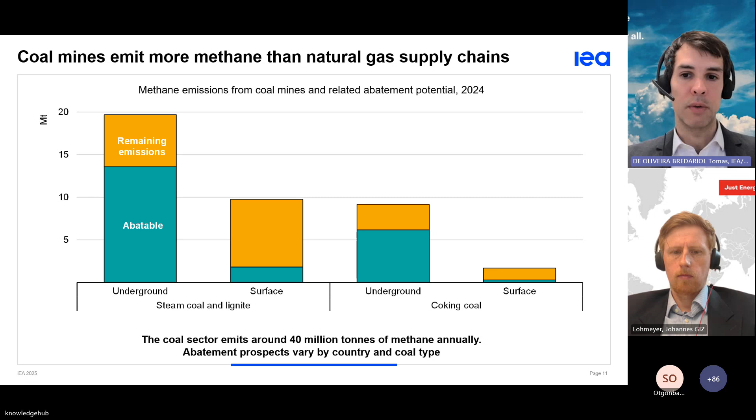One thing that's interesting to keep in mind is that in many countries, a relatively small number of mines are responsible for an outsized volume of emissions. Emissions at these sites - deep underground mines with high methane content - are often the ones most cost effective to abate, because you can potentially capture those flows and use them as energy, either to produce electricity, heat the mine, or dry the coal.

If you start with these higher-potential mines, you can often create a network of service providers and knowledge that can spur abatement in other mines where this might be a little less cost effective. This could help develop infrastructure to capture the gas, new grid connections, gas processing equipment, and also deal with institutional barriers regarding who owns the gas, for example, and who has the right to exploit it and address it.

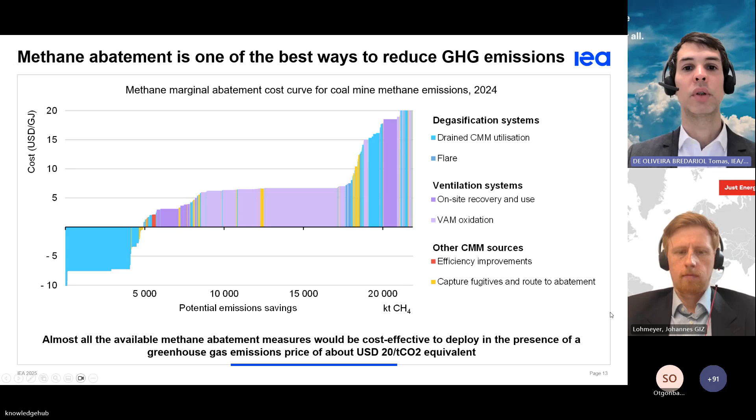Thank you. I wanted to talk a little bit about abandoned mine methane. This is not something commonly addressed. I think Germany is a very good example where this was taken into consideration, and ownership and transfer procedures for abandoned mines were established back in the 90s. The country is very much active on projects to use abandoned mine methane, and they've got a feed-in tariff which has promoted a lot of this utilization.

On a global level, we estimate that abandoned coal mines emitted around 5 million tons of methane in 2024. Here we are also showing abandoned oil and gas wells, which released just over 3 million tons. You might think that's not very much compared with the previous slide, for example China, which was emitting something around 20 million tons of methane emissions. But if you combine these sources, it's equivalent to the world's fourth largest emitter of fossil fuel methane—quite a substantial amount.

Now, especially in the coal sector, older facilities tend to emit less than recently abandoned ones, because many coal mines will flood. Once they flood, the hydrostatic pressure makes methane emissions stop, or be released at a much lower rate. So it's very important to capture that window—it depends on the rate of flooding, but this can be 5 years, 10 years, sometimes as little as 3 years. In mines that don't flood, these emissions can continue for a very long time, so it's very important that these are addressed.

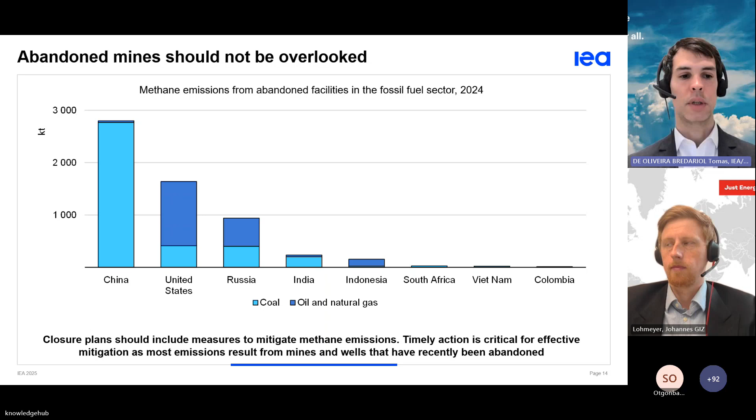There are other ways, including emissions trading schemes, offsets, or different incentives so that operators or service providers can capture these methane emissions and put them to use or destroy them. If we move to the next slide, we can see a few other options that have been used in different places of the world, and I think it's useful to go through some of these examples.

So China, a few years ago, set emission standards for coal mine gas. Essentially, if the methane concentration is above a certain threshold, operators need to either oxidize it or use it. Recently they lowered that threshold to ensure more mines are addressing methane emissions. This is, in a sense, a bit of a performance standard.

You're ensuring that whenever you have a leaky or gassy mine, which are usually releasing more methane, then you have a way to address these. But this is not the only way to do this.

This is very much a prescriptive approach, right? You need to do this, and it's relatively easy to control as well.

Now, if we look at the experience of Vietnam, they have established an action plan that targets a specific reduction from methane emissions from coal mines, and its NDC calls for support to reduce methane leakage in fossil fuel extraction. This is more of a target-based approach, and it requires some effort towards implementation, but it also provides an important signal for the industry and international stakeholders willing to work on this topic.

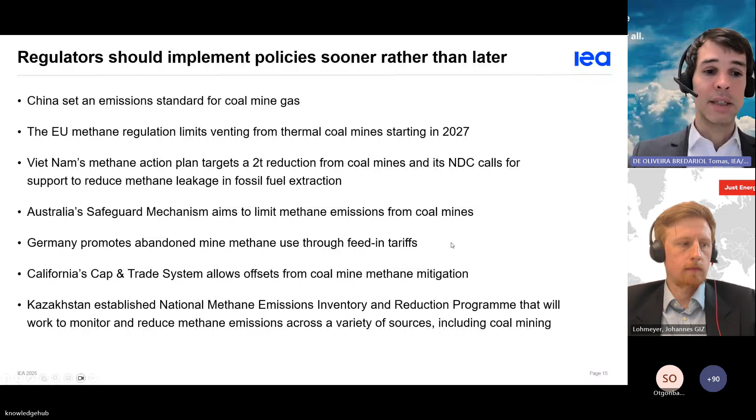That's all I had. Happy to take questions either now or later from the audience and follow up as needed.

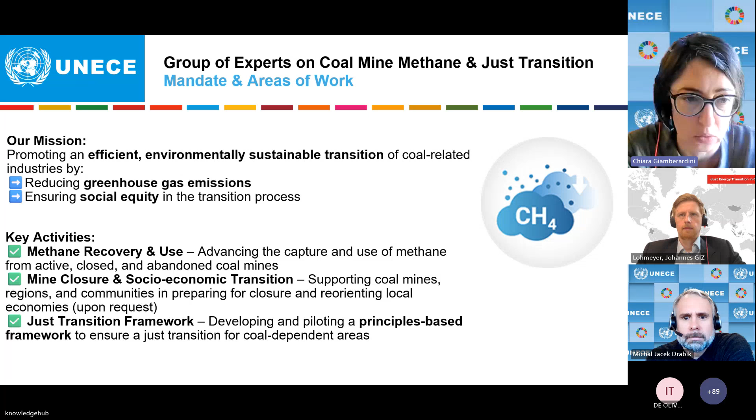We do this through a group of experts who gather physically once per year, and then work during the course of the year through mainly online trainings and exchanges, collaborating on the development of knowledge products, and also capacity building and technical cooperation activities, including through our centers of excellence in Poland and China.

We have three task forces that discuss topics of relevance to today's topic: one focused on methane emission reduction, one on the safe operation and closure of mines, and one on just transition.

I don't think we need to go again through the issue of why methane reduction is important. This has been already explained very well by Tomas. Just to say again that the energy sector is one of the main contributors to methane emissions, and coal mining contributes to approximately 12% of global man-made methane emissions. So really acting on this is very critical.

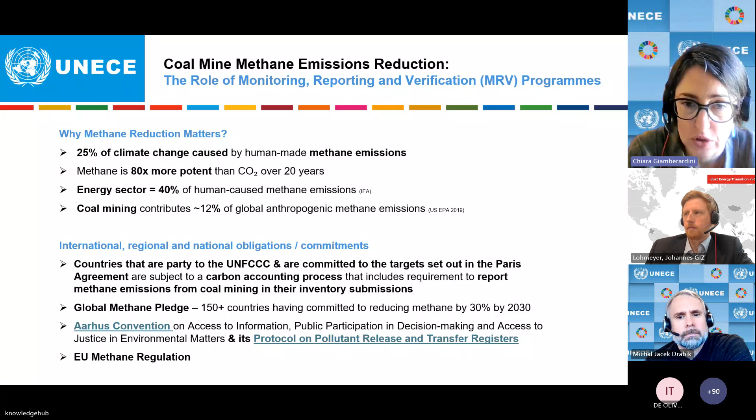So please explore those and reach out to your focal point for the protocol in your countries to see how you can find synergies on this work.

Again, you really need to know where your emission sources are at different levels - national, subnational, and local - in order to act. Unfortunately, many national level inventories are, as of today, not sufficiently detailed or source specific to allow for strong mitigation policies.

Therefore, we have been advocating for the importance of monitoring, reporting, and verification programs to better understand the contribution of coal mine methane to overall emissions and find mitigation opportunities. Unfortunately, though, only a few such programs exist as of today.

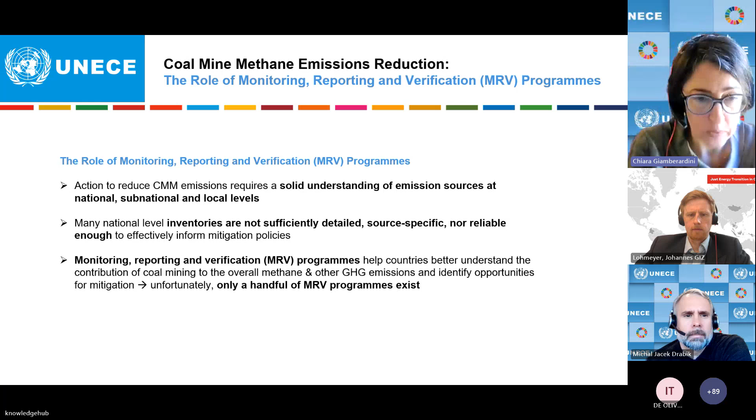So here, going through the data challenges, we can confirm that in our exchanges with our experts, this lack of data comes very high as one of the issues that really deter further action on coal mine methane reduction.

In a recent Global Methane Initiative coal mine subcommittee meeting, the lack of transparent, reliable, and timely data on coal mine methane was found to be the first barrier, the number one barrier, for coal mine methane abatement projects.

And why is that? Well, we do lack globally harmonized and consistent data on coal mine methane, abandoned mine methane, and surface mine methane, which makes comparison challenging. We also lack centralized data repositories.

So while probably most of this information exists, among others for safety reasons in underground coal mines, it remains scattered and included in highly technical reports, which are of difficult access to the public and also to policymakers. So this difficult to interpret nature of the data makes action difficult.

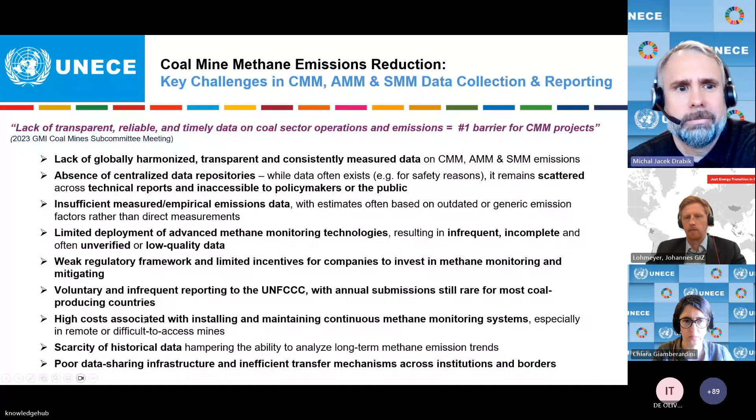So moving to site level measuring, and I will be speaking mostly about underground active coal mines. Site level measuring is the most accurate way of measuring emissions. And all around the world, methane concentrations have been carefully measured for safety reasons for a long time.

However, concentration is only one of the variables that need to be measured. To know the total volume of methane released from a coal mine, one needs to know first the volume of air throughput over a period of time, and then the concentration of methane in that volume of air during the time period at the shaft exhaust fan, and if used, at the gas drainage measurement point.

So for mine ventilation, total volume of air exiting a mine shaft can be measured using anemometers, pitot tubes, or flow sensors, which measure the velocity of air passing through the shaft. And in case of gas drainage, volumetric flow meters are used, which calculate volume on the basis of first the velocity of gas passing through a pipe, and then the pipe's inner cross-sectional area.

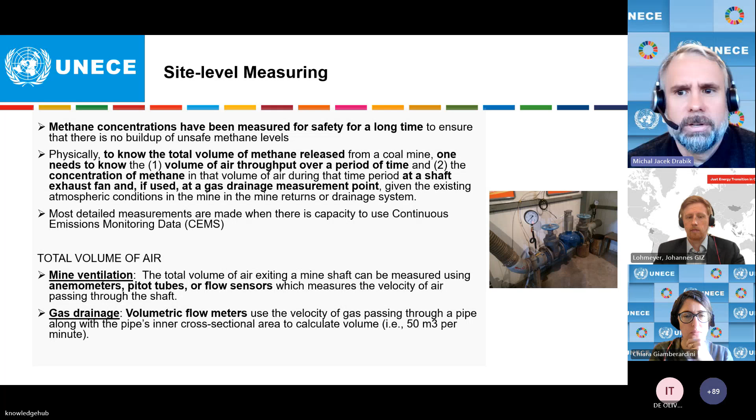As mentioned already, to get accurate data, proper calibration of equipment is necessary. Besides that, measurement must be taken at locations relevant for emission monitoring. For ventilation measurements, they should be taken in the exhaust shaft or in each roadway at the intersection of all roadways and the upcast shaft, or at the shaft fan. As for gas drainage measurement, measurements should be done at the wellhead for individual surface boreholes or at centralized gas collection stations.

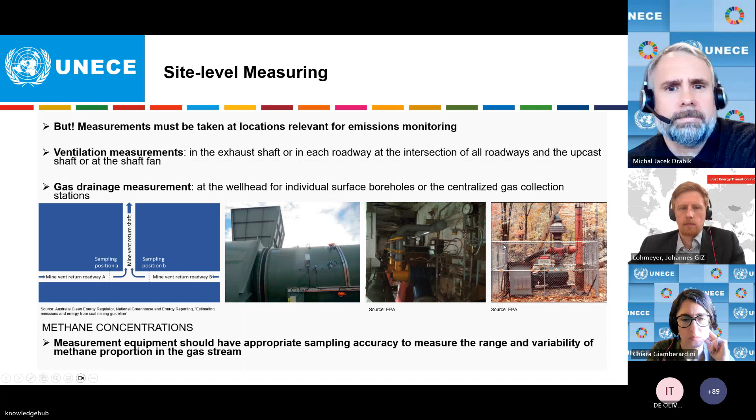Moving to remote sensing, recent technological developments allow us to collect data independently of mine operators, which is great. It gives us the advantage that we do not need to rely on the data reported by mines; we can check it independently. Such measures can be done by installing measuring and detecting equipment on aircraft or drones and flying them over the area subject to measurement, or measurement can be done by satellites. In case of the latter, we need to remember that instruments are optimized for different tasks, and therefore, for the sake of accuracy, there is a need to establish a unified observing system that is fit for the infrastructure that is to be observed. Next slide, please.

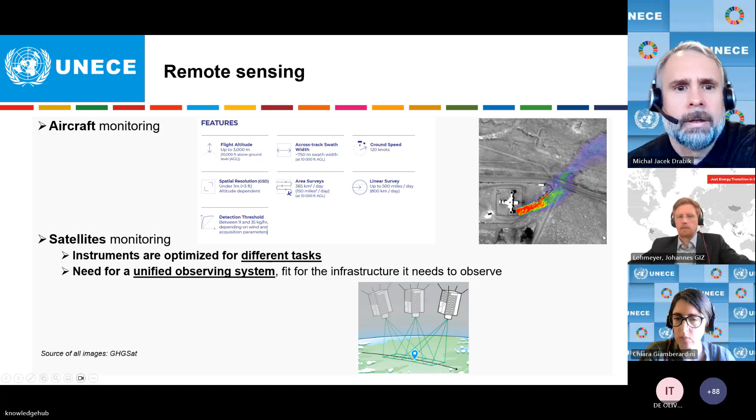Each satellite has its own weaknesses and blind spots. For example, TROPOMI is limited to large emissions and therefore is great for detecting super emitters, but requires combination with high spatial resolution satellites, such as those used by GHGSat, for obtaining more precise data on exact sources of emissions. So there are those satellites covering a very wide area of terrain that spot high emissions, but are not technically capable of zooming in on exact point sources of emissions. And there are those of the second type, which are great at precisely measuring the exact point sources of emissions. However, it would be very inefficient to fly them all around the world trying to spot emissions. So those two need to work together as a system.

We also need to remember that no satellite provides constant observation. This is important because methane flow at a source can vary within a day or even hourly, as it depends on pace of coal production, geology, ventilation velocity, barometric pressure, etc. This is, by the way, the basis on which mine operators often question data obtained by satellites, claiming that the observations are not representative for the whole period in question and that they are skewed by observed unusual discharges. Therefore, again, corroboration with mine level measurements is necessary, which is somehow a bit paradoxical, because remote sensing is supposed to provide us with the ability to measure methane emissions without relying on data reported by coal mines, but at the same time, for the sake of precision, corroboration with mine level measurement is necessary. So this cooperation is still needed.

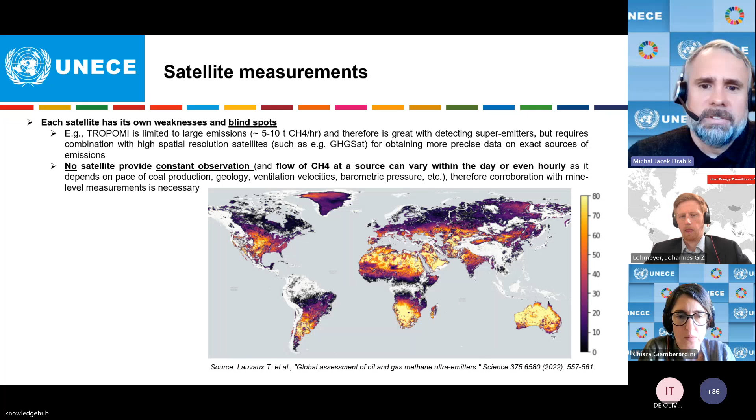We briefly covered monitoring. However, we have to remember that in addition to sound monitoring, reporting and verification are also needed to deliver quality data. In terms of reporting, it has to be ensured that facilities have the technical capacity to correctly monitor, measure, and report data. There is a need to balance the burden put on reporters and the level of detail sufficient for mitigation. There is also a need to ensure that the developed reporting system is easy to access and facilitates documentation, meaning a data management system is put in place.

As for verification, we have to ensure that measurements are consistent, complete, and aligned with equipment standards and procedures, that results are calculated accurately and checked for consistency, and that we enable independent verification. With all that, we will be able to build robust MRV programs that will allow us to establish a clear baseline of methane, form an understanding of the variation in methane flows and concentrations, provide information for setting up accurate inventories, and provide project developers with confidence in gas availability over time.

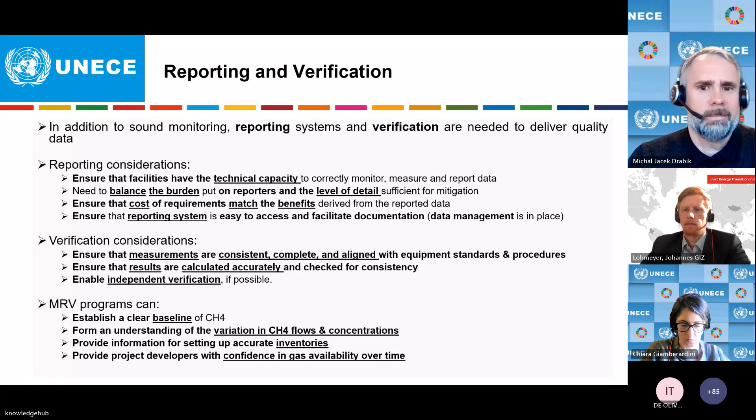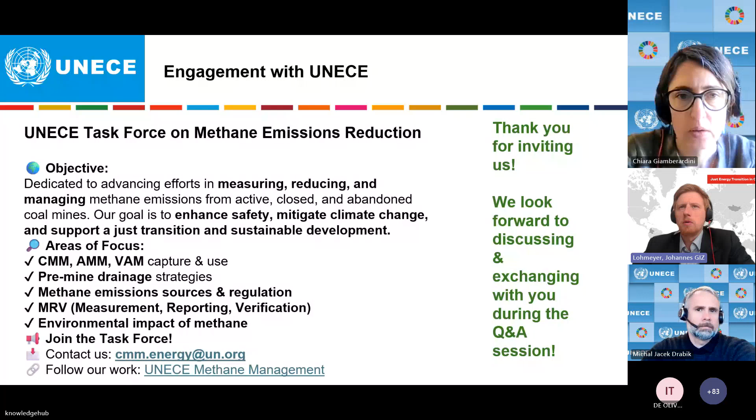Thank you, Chiara and Michal, also for showing us what UNECE and the group of experts does on coal mine methane and just transition. I think it's very important work and great tools, and I assume there are plenty of connecting points for our audience. I would also like to come back to your offer on that very slide. I look forward to discussing and exchanging. So please, dear audience, for questions, post them in the chat or on the Q&A section, and we will address that later. But now we're getting more and more concrete.

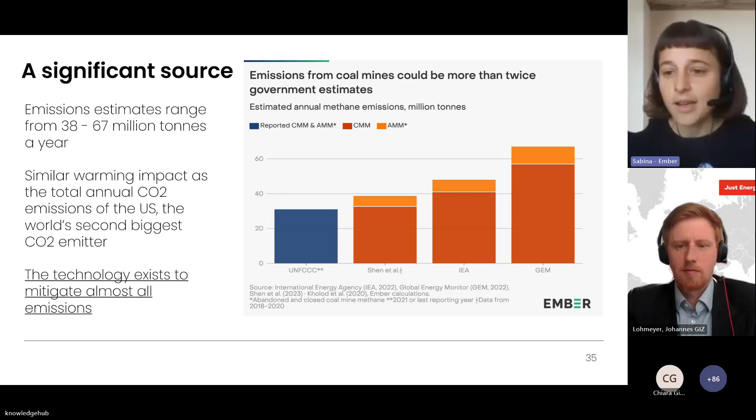In Europe, many of the mitigation projects are actually focused on mitigating methane from abandoned or closed mines. Next slide, please.

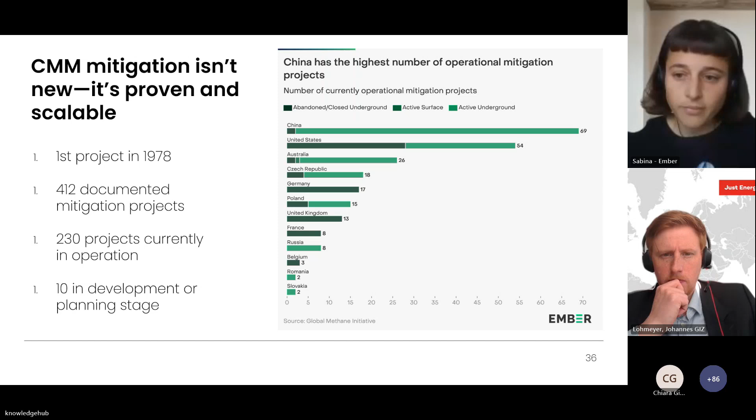So what are the opportunities that we have to capture or mitigate methane from coal mines? It really depends on the type of mine and the source. For an underground mine, we have three opportunities or sources in which we can capture the methane: that's from the drainage, the ventilation air, and once it's been closed or abandoned. Whereas for surface mines, we really just have one opportunity, and that's pre-drainage, so draining the methane.

I'm going to go through each of these now. An important thing to highlight is that with coal mines, we know exactly where the methane is being emitted. It's not a source that we need to go and find where the leaks are. It's an emission, and we know exactly where it is.

So active underground mines, one of the first ways in which we can capture methane is from methane drainage. This is when you capture the high purity gas at its source before it enters mine airways, so you can drain it from the coal seam before or after mining the tunnels. This way of capturing methane results in high concentrations, so it's a methane source that can easily be utilized for energy recovery, selling the gas, or if you can't use it, it's possible to flare it. Something with methane drainage is that mines often already have this infrastructure in place, because if it's an underground gassy mine, they might already have to be draining the methane in order to start safe operations. So it's sort of seen as a low-hanging fruit in terms of mitigation from underground coal mines.

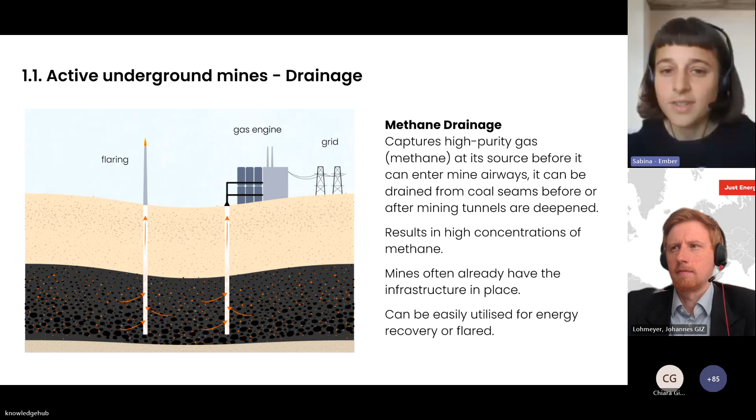Ventilation air methane is seen as a more complicated methane source in the coal mining world. This is when methane from the coal seams is seeping into the mine air shafts, and then this will make its way to the atmosphere. It's a source with a really large volume but really dilute methane concentrations, which means it can be harder to utilize. The methane can definitely be destroyed though, that's not an issue. The most common technology is what we call RTOs, regenerative thermal oxidizers, which I think the next presentation is going to go into much more detail on. In some cases, when the concentrations are high enough, you can also generate electricity. So really there's not an issue to destroy the methane. The issue can sometimes more come around when trying to utilize that methane.

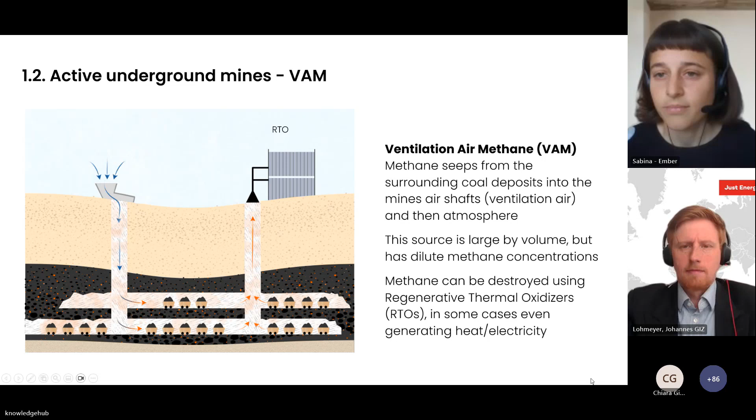So yes, the challenge isn't the technology, it's really in the incentives. For example, the drainage gas is the easiest opportunity to utilize and profit from coal mine methane, and there's currently 175 mitigation projects operational. Ventilation air methane, on the other hand, comes at an average cost of $8 per ton of CO2 equivalent - that's the newest number from the UNECE. And currently there's only 14 projects operational. You can also see this on the plot on the right: everything in green is the number of drainage gas projects over time, and you'll see two-thirds of all reported mitigation projects are actually using drainage gas. It can be used for combined heat and power, domestic use, gas sales - you'll see power generation is used a lot, whereas other mitigation projects for which VAM is also included, it's in grey, and there's not as many around.

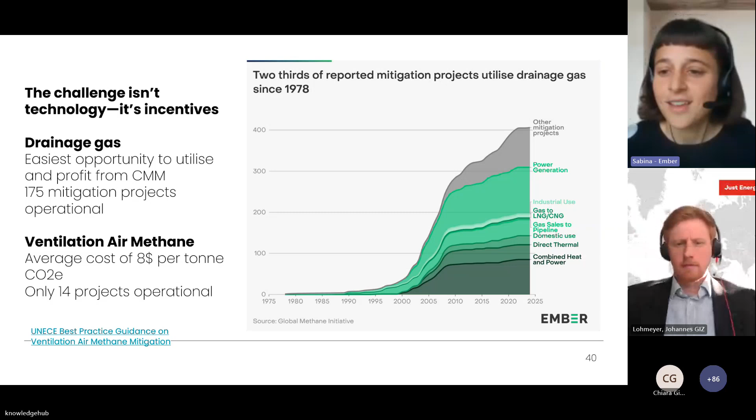So for closed underground mines, once an underground mine is no longer mining coal, it does not mean that the emissions stop. All this remaining coal in the coal seams that has not been mined - the methane contained there can continue to seep into the ventilation air shafts, and this will eventually make its way to the atmosphere if the mine hasn't been closed properly. These emissions typically occur at well-defined point sources, such as ventilation shafts or pressure relief vents, and the methane emissions from these mines can be reduced to almost zero if they're flooded, sealed well, or if the methane is captured and used as a resource. I compiled the most common uses for methane from abandoned or closed underground mines, and the two most common would be combined heat and power and power generation.

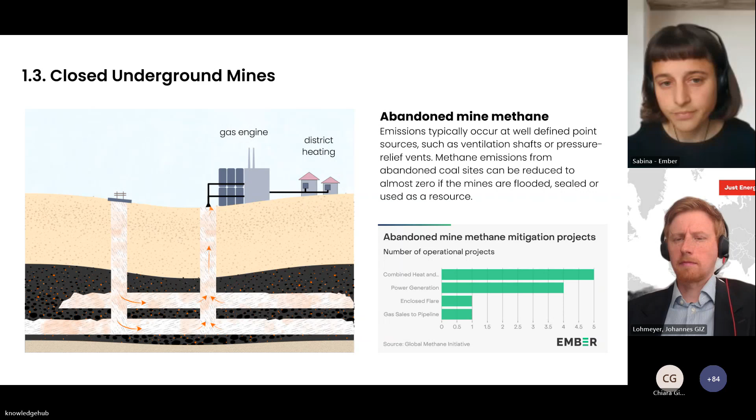Here I wanted to show an example. As Thomas mentioned, Germany has a great example of using abandoned coal mine methane. On the left, the green line is the reported abandoned mine methane emissions from Germany since 1990. In the 2000s, this suddenly drops once there were incentives for companies to capture and use this abandoned mine methane. In the first 16 years, they already avoided 100 million tons of CO2 equivalent.

The methane was extracted using degassing pipes and fed into heat and power plants, and the electricity produced was fed into the grid, while waste heat was used to generate hot water in households. You can see the produced power and heat on the plot on the right. The latest figure I found, for 2023, was that this abandoned mine methane was still supplying around 67,000 households with heat and 234,000 households with electricity.

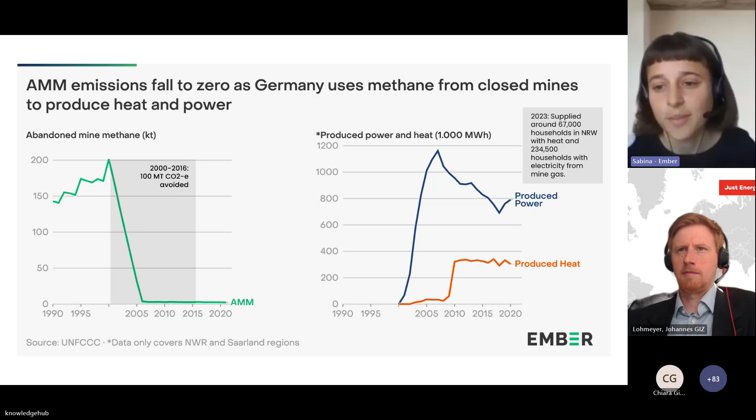So active surface mines, what can we do here? There's really only one option up until today, which is pre-drainage. Effective drainage and capture of methane at surface mines requires that drainage holes are drilled in advance of mining, before mining a certain coal seam. This is really not widely used at all. I think it would be hard to find examples of this already used around the world.

This is really because surface mines haven't had to worry about their methane emissions before, in terms of safety, and also in terms of actually monitoring their methane emissions. It's not really on their radar, but this is slowly changing.

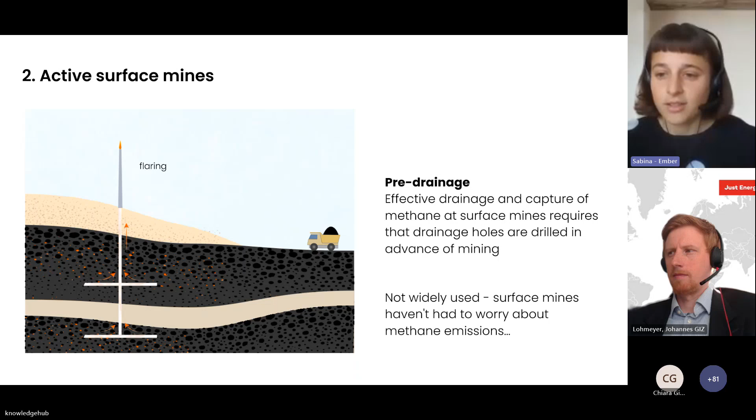For example, in Australia, coal mines, including surface mines, will have to start in a way paying for their emissions, and methane is included in this. And this has led to—if we go to the next slide, please.

This has led to this most recent study that came out this year, which looked at pre-drainage at surface mines in the Bowen Basin, Queensland's major coal mining basin in Australia, where there are a lot of surface mines. The study found that by applying pre-drainage, they could reduce coal mine methane emissions by 38 to 46%. A really big possibility to reduce emissions here.

The study also looked at different opportunities which might enhance the financial viability of pre-drainage at surface mines. It found that displacing diesel with the methane drained would provide the highest positive cash flow for surface mine mitigation options, above electricity generation and selling the gas. Obviously, this is in a context in which a coal mine would otherwise have to pay for their CO2 equivalent emissions. Next slide, please.

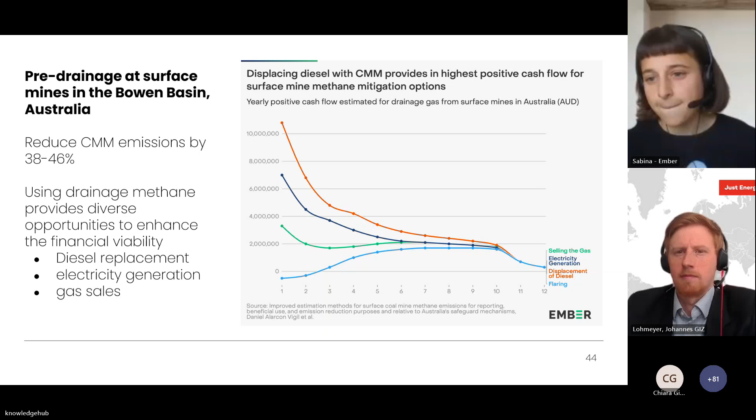To summarize, the best mitigation strategy is always to keep the coal in the ground. When we mine coal, some methane will be emitted, and that is unavoidable, so really the best thing is to reduce the amount of coal mined. However, for active and closed coal mines, the technology to mitigate methane emissions is proven and has been used globally. Mitigation options can be profitable to mines when the methane can be utilized, though this is not always the case.

So what's holding us back? It can sometimes be a very costly investment, especially when the methane can't be utilized, or if the coal mine has to start using a lot of different types of technology that they don't already have on site.

This leads to a lack of incentives for coal mines—what we call carrots and sticks. Carrots would be carbon credits, for example, and sticks would be regulation requiring coal mines to pay for their methane emissions. In general, there's also a knowledge gap, not just in that many coal mines haven't really understood how much methane they're emitting or how much they could be capturing, but also in terms of policymakers really understanding how feasible these technologies are for mitigating methane emissions at coal mines.

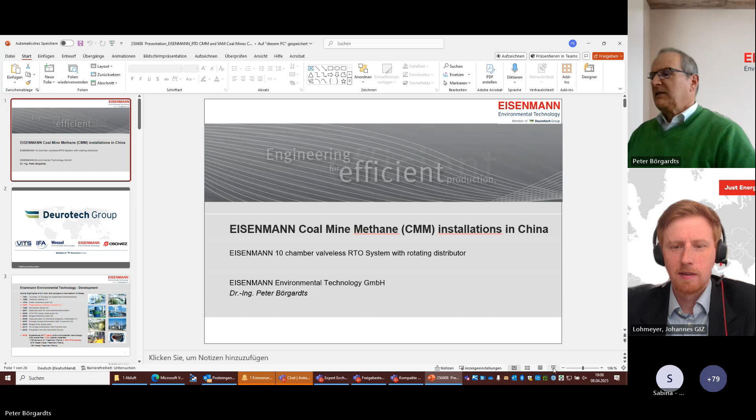So Eisenmann coal mine methane installation in China. The plants which we have built in this area are all in China. I mean, it's the biggest market, and I will show more in detail.

I'm from Eisenmann Environmental Technology. We are part of the Deurotech Group, and we are doing already regenerative thermal oxidizers since '87 with a special system, which I will show you. That means the technology is well developed and it's really suitable. Sometimes we are astonished that there are on the market some ideas which really don't fit to the technical background, let's say.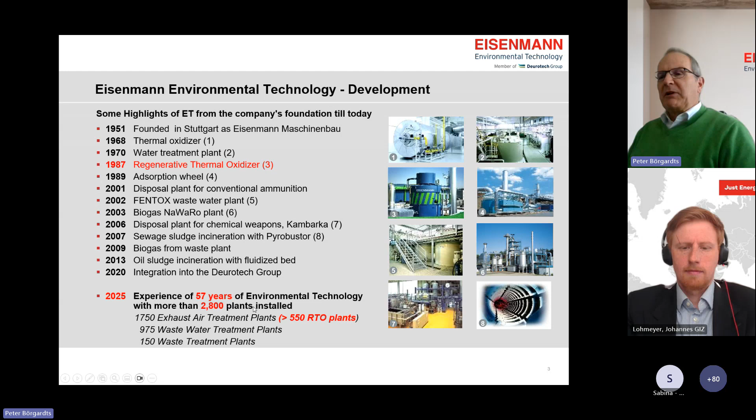Eisenmann, we make environmental technology now for 57 years, starting in 1968 with a thermal oxidizer. We have built more than 2,800 plants, and from these 2,800 plants, there are 550 RTO plants.

In the air treatment, which is interesting for the CMM projects, there are different thermal technologies. One is the catalytic, for instance, which we are also building, especially in Australia. They think the catalytic ones are perhaps a better solution than the regenerative ones, so there's a project ongoing where they will check it. I think the regenerative, if they make the global energy balance, is still the technology which has to be used because the overall input of energy is smaller than for the catalytic one.

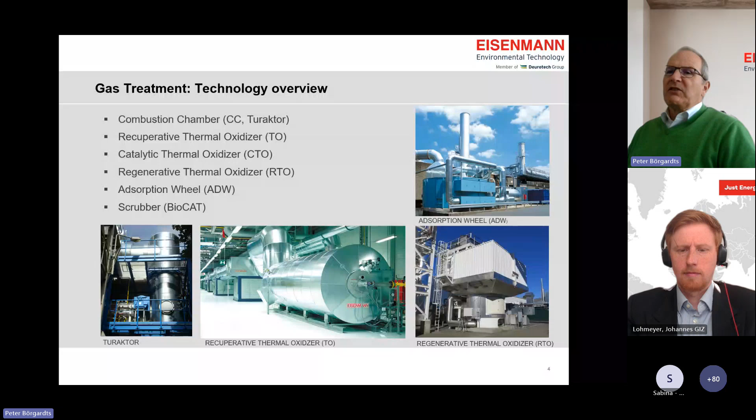So how does an RTO work? The process gas is entering the RTO. You have a bed of ceramic heat exchanger. The cold air coming in is heated up by this hot ceramic heat exchanger, goes through a combustion chamber at 850 or 950 degrees, and then the hot gas gives back the energy to this ceramic bed, and then it's coming out of the system. The high efficiency is shown.

You come in with 25 degrees, you heat up to 850, and you cool down again to 65 degrees. That means the delta T between inlet and outlet is only 40 degrees. With this 40 degrees, you need to operate the system, which means that if you put in so much energy that you can heat the process gas by 40 degrees, then you don't need any additional gas, whether you're injecting it here or there, doesn't matter. That's the autothermal point of the system, and that can be calculated.

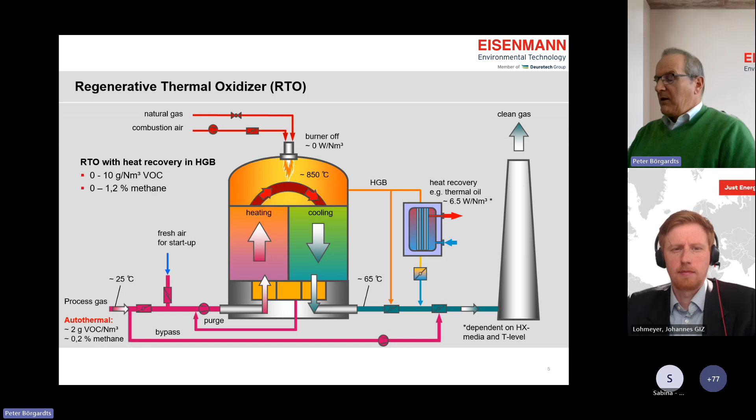That's the principle of the CMM methane mitigation systems where you don't have only VAM, I will show you in a minute. I'll make this quite short - there are mainly 3 systems on the market. The easiest and the cheapest system is a 2-chamber system.

You go in, the off gas, the VAM or whatever, the mixture is heated from the bed to the gas. You get the energy, and then the gas gives the energy back. And after 60 seconds, you have to switch the valves, because otherwise this bed is cold and this one is too hot. So you switch the other way around, and then you run like this.

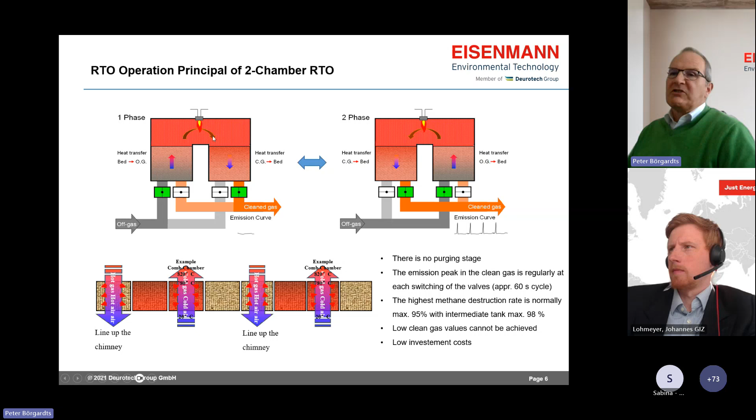To overcome this, you have to purge the chamber. This leads to the 3-chamber systems, which you see here. That means it's the same: the off gas comes in, is heated, comes out here. But before this chamber gets to the clean gas chamber, it's purged here. And then this methane, which is still in this chamber, is going back to the system. So what you see here, you have an emission curve where you don't have the peaks. That means you have methane destruction rates 99+%, which has two effects: one is you get more carbon credits, and you also get more energy out.

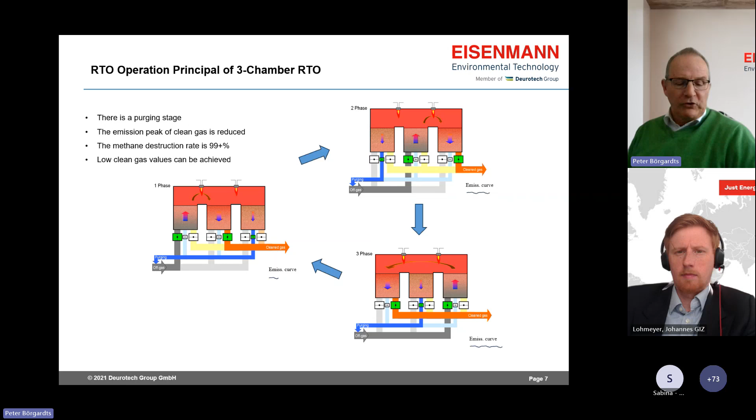And then Eisenmann has developed a 10-chamber system with a rotary valve below. The principle is generally the same as a 3-tower RTO. There's a purge phase after the exhaust gas stage. You see it here, the blue one is the purge, the green is the clean gas. So if you look here, this one is now exhaust air, purged, clean gas, exhaust air, clean gas. And like this, it turns around, and you have only to purge 1/10 of the system. By this, you have no emission peaks. You have a very high VOC damage rate, 99.6%. And like this, high economic benefits and social benefits, because the efficiency is so high, but the system is a bit more expensive than the 2-chamber system.

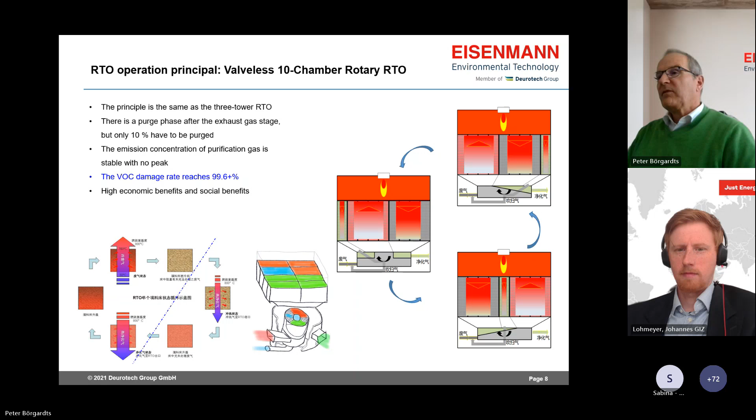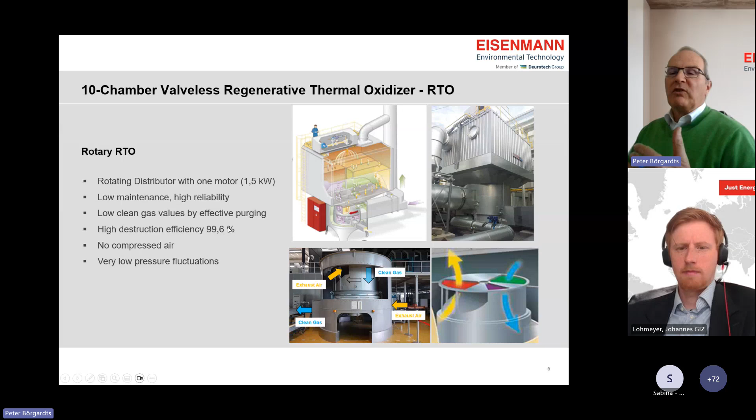So here you see it, I will not go more in detail. This is a rotating system. This one is rotating, here you have the 10 chambers. You have only one motor, not 9 flaps like the other system. Low maintenance, high reliability, low clean gas values by effective purging, which is very important, 99.6%. So it's really very low methane which is coming out of the system.

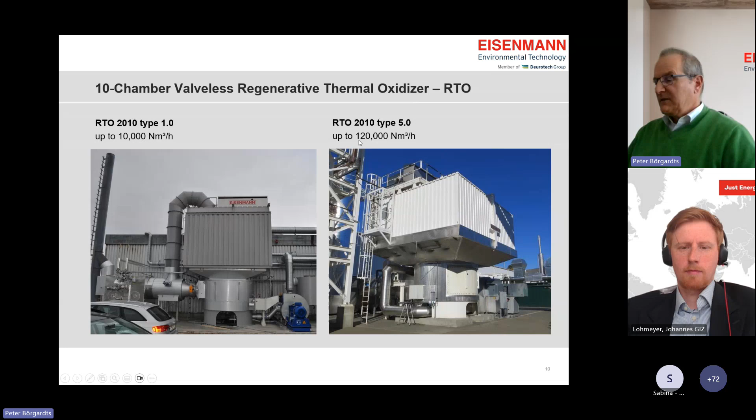These plants can be built from 10,000 to 120,000 norm cubic meter per hour. And here, that was our first plant, which we have built in China, 100,000.

Already in 2010, everybody thought about the Kyoto Protocol, that there will be carbon credits which have to be paid by everybody. But in Copenhagen, it was not resolved. That means in 2010 it was not economically viable. So we built this plant also in the mountain area. We showed that it works, but they only operated for quite a short time, because it was not economic, only for VAM mitigation. And that's a problem, it depends totally on the CO2 credits, how much the amount is. We have already seen with $15 to $20 it can be economic, but at this time it was much lower.

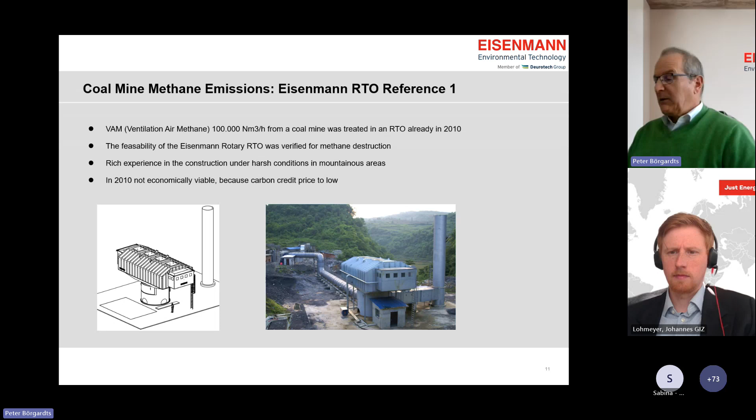And these systems run really autothermal with zero gas at 0.2% methane or 2 grams VOC. And if you come in with higher concentrations, then you can produce steam.

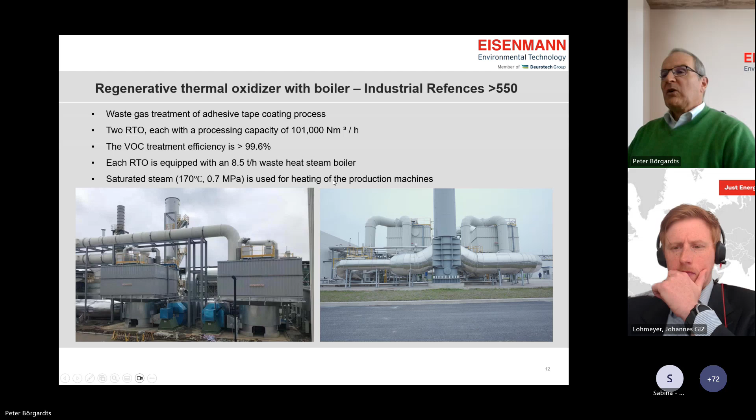So this we are transferring now to the coal mine CMM projects. And generally they have these 5 boxes: you have a gas delivery, you have a special mixing box because we want to have higher concentrations up to 1.2%, we have the RTO, we have a steam boiler and a steam utilization afterwards to produce electricity. Because if we have higher concentrations than 0.2% methane, there's no gas consumption, but you need some electricity to run the high volume of air through the RTO.

So what is the tendency? We mix exhaust gas 1 to 30%. It could be drainage gas, mostly with the spent ventilation air, so with the VAM, or also with fresh air, to 1.2% methane. So 1.2% is the maximum which is allowed to put in a regenerative oxidizer.

Because this is 25% of the lower explosion limit of methane, the security of the process is guaranteed, and the target is to provide as much methane as possible, maximize the performance of oxidation equipment, and recover as much heat as possible. Because for the system, if we run it with 0.2%, it also reduces emissions to the atmosphere, but the system is the same whether you have 1.2% and reduce down to 20 ppm methane, or 0.2%. So it's much more effective if you get in with higher concentrations.

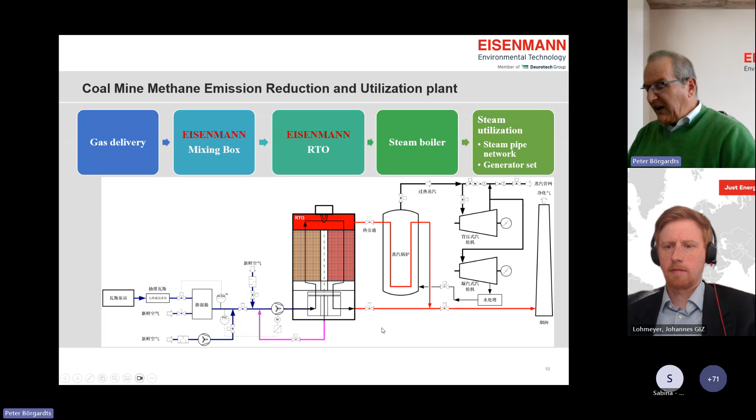So the exhaust gas boiler is then here. We use waste heat from the hot gas bypass, produce saturated and superheated steam, and can use this in the turbine to produce electricity. So that is the principle, which is already economic without any carbon credits. And with the carbon credits in China at the moment, it's around 95 RMB. It's very viable and very interesting.

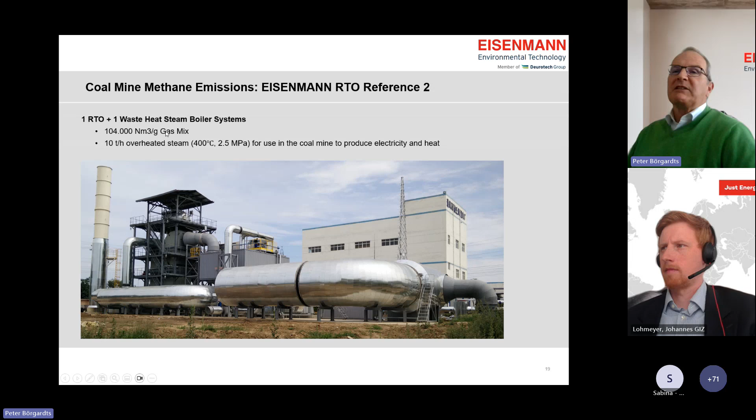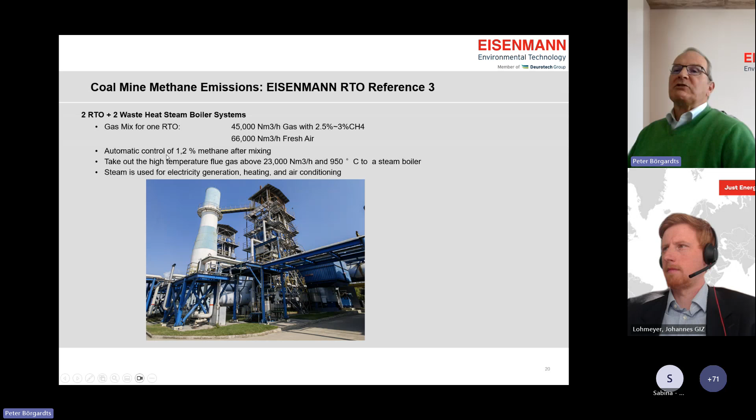Here you can see some examples. RTO with waste heat steam boiler, 104,000 norm cubic meter gas mix, 10 tons per hour overheated steam. The second example, a gas mix with 45,000 gas with 2.5 to 3% methane, and here 66,000 cubic meter of fresh air, because they don't have VAM. We control automatic at 1.2%, and then you can take out the high temperature flue gas and produce steam and electricity. And the last plant, installed last year, gas mix for 1 RTO, 6,700 cubic meter with 15% methane.

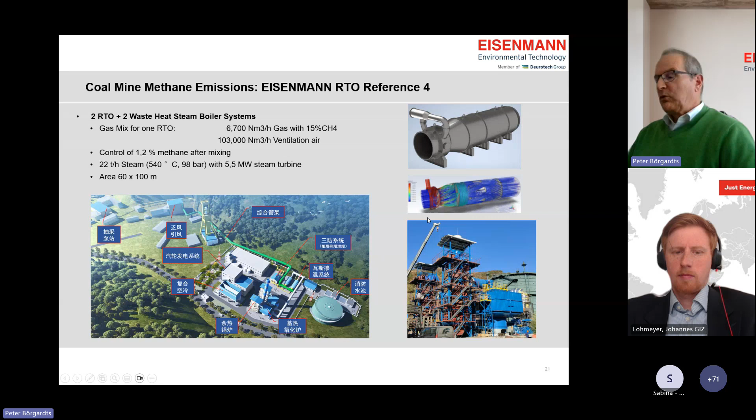103,000 ventilation air methane, and here produced 22 tons per hour steam. So it makes 5.5 megawatt electricity. Here you see the mixing box, which is very important, RTO and automatic control system, so that the technology is really there to mitigate. And if there's additional drainage air or something available, it's already now economic at these prices which we have now. Thank you very much.